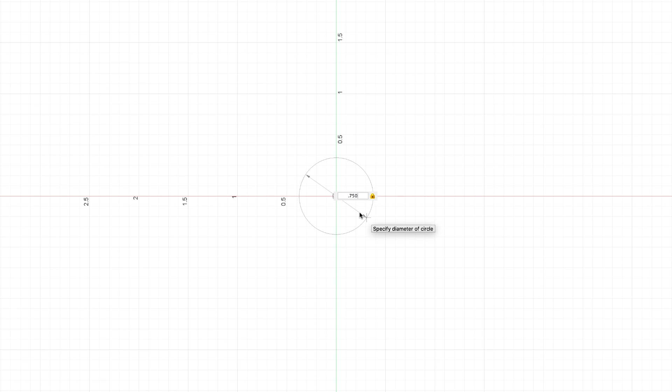And what I'm going to do is go ahead and drop down 3 more of those circles. So C for circle, I'm just going to put it right here. I'm going to click 0.750, enter. C for circle, 0.750. C for circle, 0.750 and enter.

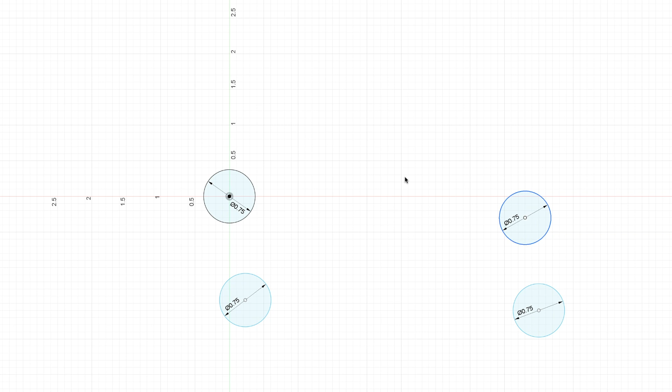Now I want these to kind of be in the shape of a rectangle. Some of these got to be in line with each other. So what I'll do is just come up to constraints, hit horizontal vertical. I'm going to hit that center point and this center point. I'm going to go to this one and to that one, this one to that one, and this one to that one. I'm going to press D for dimension.

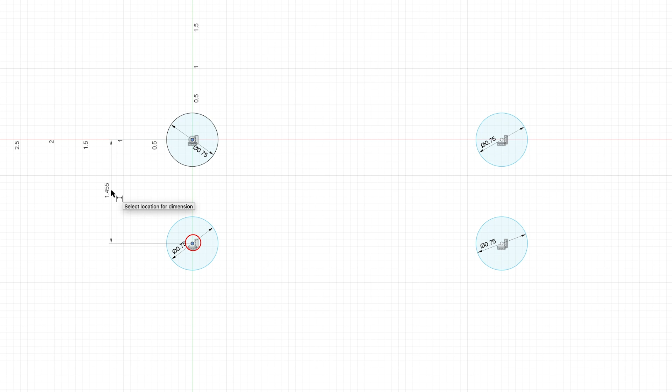I'm going to go from right here to right here. That is a dimension of 1.150. Enter. I'm going to go from here to here. That's a dimension of 5.25. Enter. Now I'm going to press C for circle.

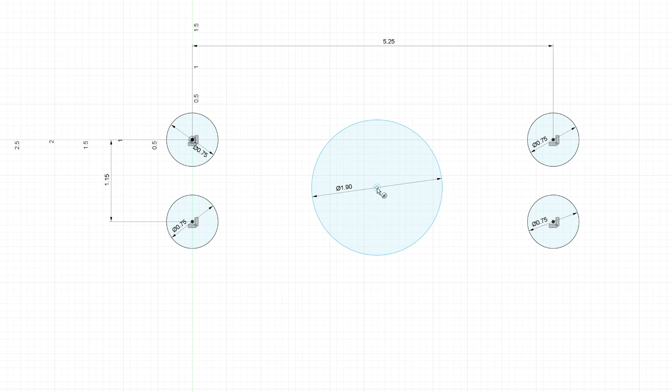I'm going to click right here and type in 1.9. Enter. C for circle. I'm going to let it snap right to the middle there. I'm going to click and drag it out. 1.05. Enter. C for circle again, snap right in the middle, type in 1 and enter.

I'm going to go ahead and select that 1-inch circle, make sure that it's highlighted, and then I'm going to press X. That turns it into this dotted line, and we won't have to bother with that when we go to extrude anything. Let's go ahead and add some dimensions to it.

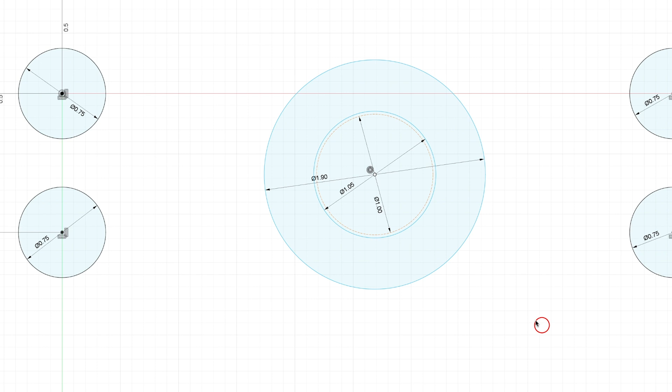So I'm going to press D for dimension. I'm going to go from here to that. The dimension is 2.625, enter. I'm going to go from there again to the same center point. I'm going to drag it over to that side and type in 0.575, enter. And now we got all that stuff where we want it.

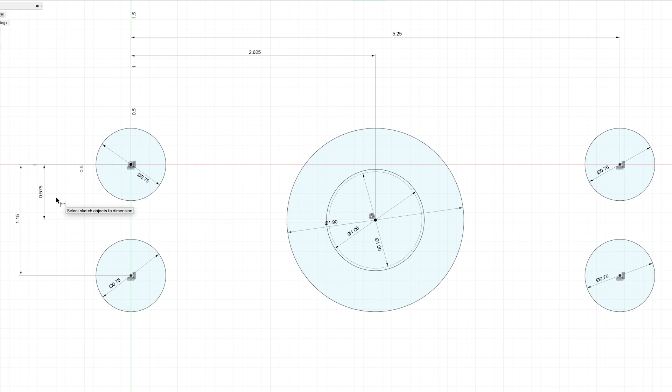So I'm going to go ahead and press escape to get out of the dimensions command, and I'm going to press L for line. With the left mouse button, I'm going to click on the edge of my circle, holding down the left mouse button. I'm going to drag that line out. And what I'm going to do is I'm just going to run it right into the side of the circle. I want to make sure I don't go below the center line of this circle, like down over here.

Again, I'm going to click, drag and hold. I'm going to kind of come over here and let go. Click and hold, drag it over, touch the side of the circle, let go. Again, like that.

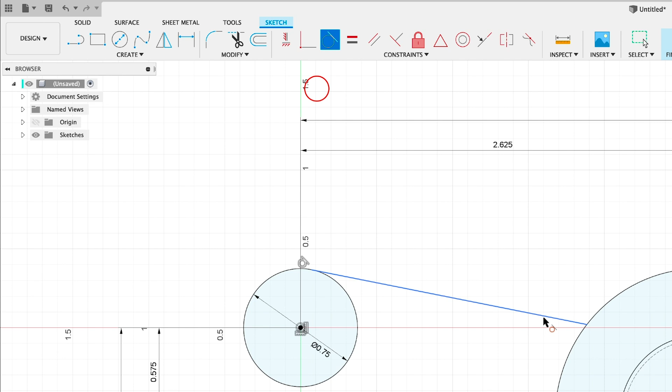Now we can come up to constraints, say tangent. I want this line tangent to that dotted line. This line to the dotted line. This one to there. This one to there.

Now I'm going to press escape and C for circle. Out here on the edge, I'm going to click and drag out. That is a 0.6, enter. C for circle, again over here off to the edge, 0.6, enter. I'm going to come up to constraints, say tangent, that to that one to that one, this one to that one, and that one to that one.

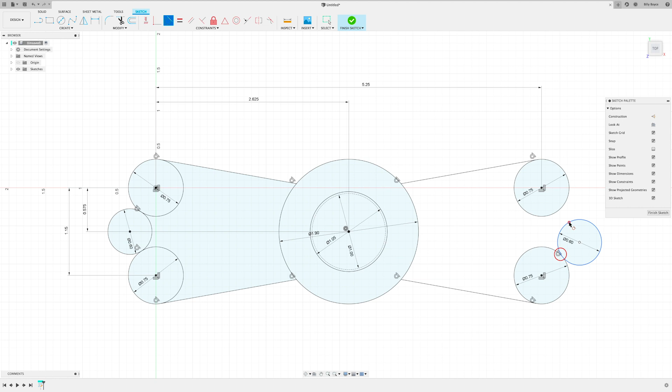Okay, now we can come up to modify, and we're going to break. I'm going to click this top, and you can see in between the 2 red X's is where it's breaking, and then there.

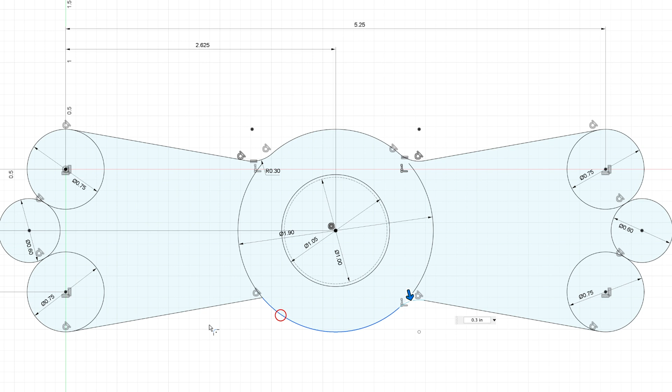Now we can come up to modify, fillet. I'm going to click here and there, then type in 0.3. I am not going to press enter yet. Now I'll make that selection, and this one and that one, this one and that one. Now I can go ahead and press enter.

I can right click, say press pull. I'm going to choose that and these circles, and type in minus 0.75, and enter. Okay, so that finishes off sheet 1 of 3.

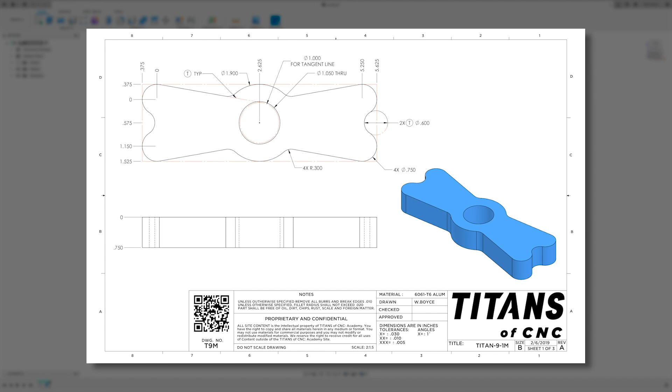Now we can go ahead and move on to sheet 2 of 3. We're going to add those counter bores first. So what I want to do is come over to the sketch and hit this little arrow, that'll drop that down, and then I'm going to click that crossed out eye. That'll turn the sketch on so we can see it, and we're going to use these points from the circles we already drew.

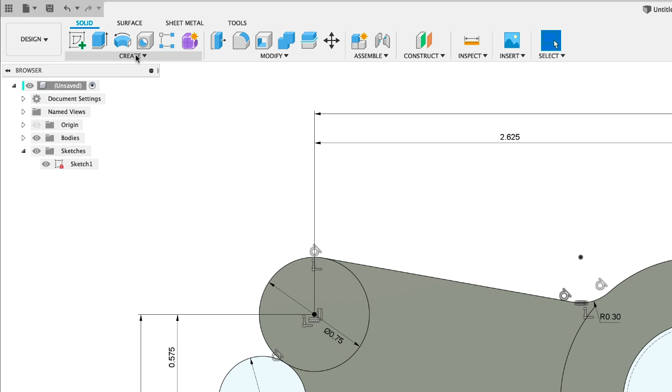So we're going to go create, hole. We're just going to select those 4 points. We're going to make sure we're set to distance, we're going to do the counter bore, and a through hole with a drill tip point.

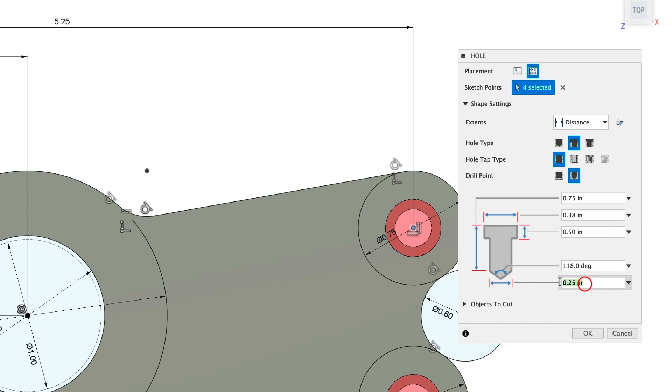The total depth of the drill hole is going to be 0.75. The diameter of the counter bore is going to be 0.38, and the depth of that counter bore is going to be 0.5. 118 is fine for the drill tip, and the diameter of the through hole is going to be 0.25. We can go ahead and say OK.

Then we can come back over here and click that eyeball and turn those sketches off so it'll look like that again. Okay, that looks good. So let's go ahead and prep this to do the next cut.

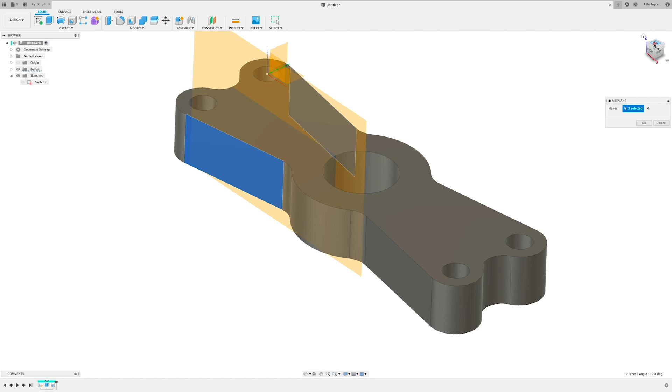We're going to come up here to construct, and say mid-plane. I'm going to choose that angle there and that one there, and it'll slap us down a plane right in the middle of our part, which is kind of handy. I'm going to go ahead and say OK.

Now I'm going to come up to construct again, come on down here to point at center of circle. I'm going to select that and select that edge, and that'll give us a point right there. I'm going to say OK.

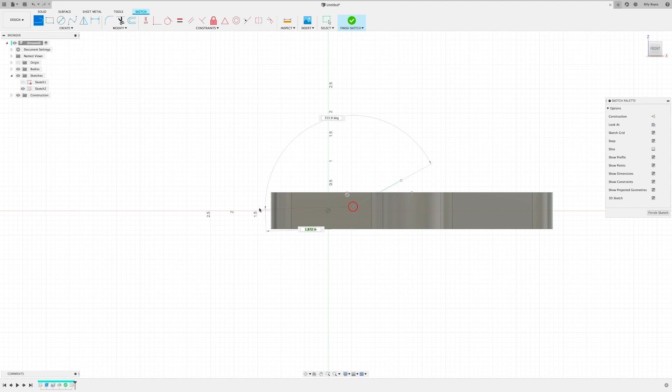I'm going to come over to create, sketch. I'm going to choose that new plane, and then press L for line, or you can come up to create line. I'm going to snap right here and just do this little shape, have it look something like this. I'm going to press escape.

Then I'm going to come up to constraints, say horizontal vertical. I'm going to select this one right here. I want to ensure that this one is also horizontal, so I'm going to go ahead and click it. I got a little warning letting me know, yeah, it already was, so we're good. I'm going to press escape.

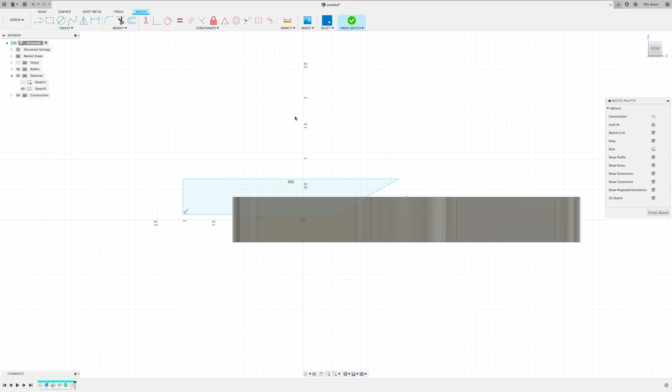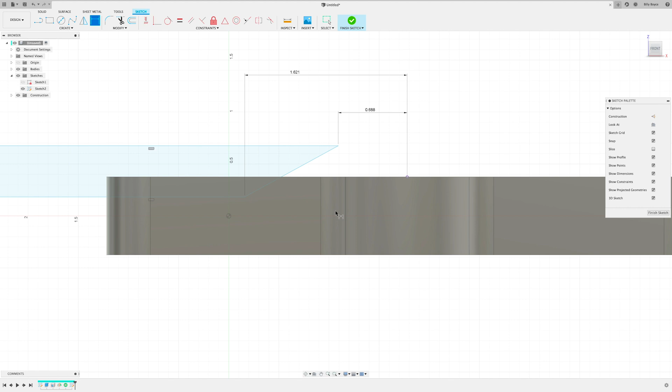I'm going to press D for dimension. I'm going to go from that endpoint to this point. That is a dimension of 0.688, and enter. I'm going to go from that point again to this one. That is a dimension of 1.621, and enter. Then we're going to do a dimension from here to that bottom line. That's going to be 0.250, enter.

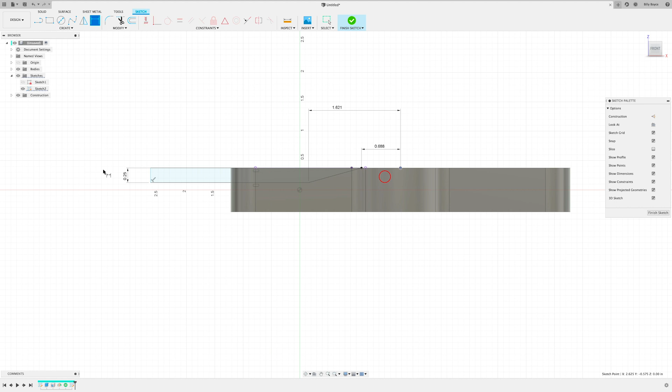We can go ahead and come up to constraints, coincident. I'm going to go ahead and say this point to this edge, looks good. I'm going to press escape, D for dimension. We're going to go from this center point to this edge. We'll just say 4 inches and enter.

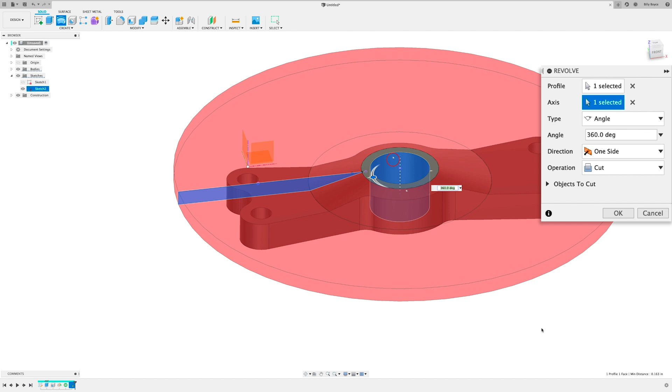Then we can come up here to solid, create, revolve. It automatically selects the sketch that we had open. It's already ready to select the axis, so I'm just going to click the side wall of that through hole, and we should get something that looks like that. I'm going to go ahead and say OK.

Now I'm going to come up to modify and fillet. We'll go ahead and add these fillets right here. Select both of those, and then you can type in 0.5 and enter. We can see we have a 25 thou chamfer around this outside edge.

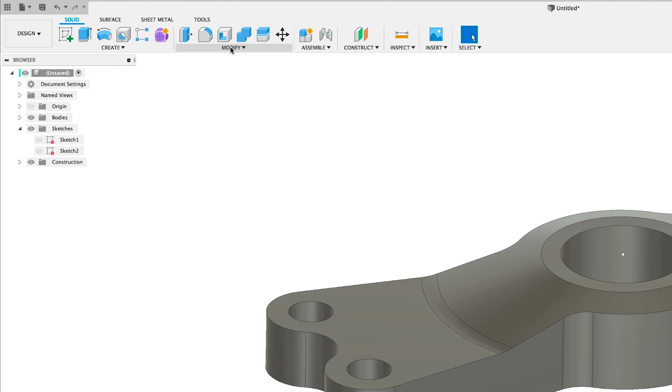So we can come up to modify, chamfer, select that edge and type in 0.025. Go ahead and hit enter. And that finishes off sheet 2 of 3.

Now we can go ahead and move on to 3 of 3. First thing I'll do is come up to create sketch. I'm going to choose that top surface. I'm going to press C for circle. I'm going to let it snap right to the middle.

And I'm going to drag that out, type in 1.25 and enter. I'm going to go ahead and right click, press pull, and I'm just going to select that entire circle.

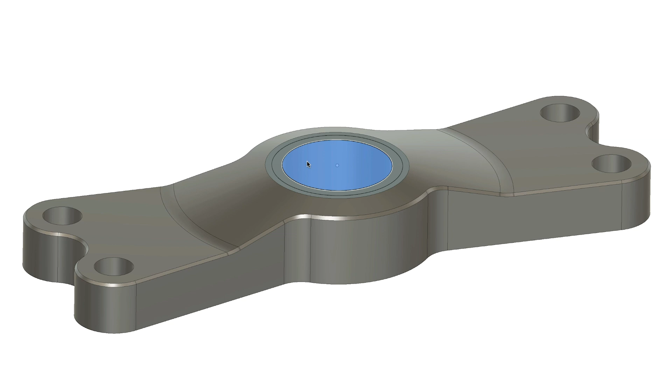And then I'm going to say minus 0.5. Enter, and there we go.

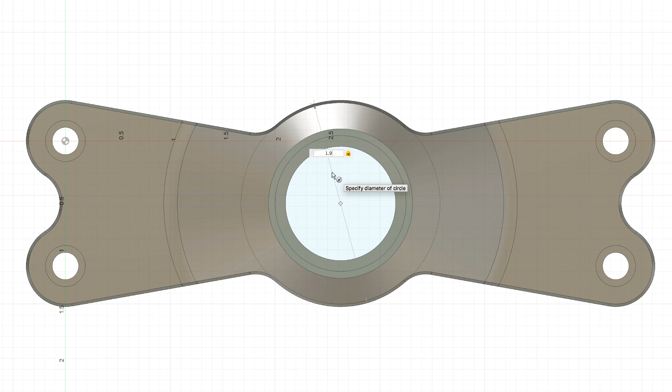We're going to go ahead and create another sketch on that top surface again. I'm going to press C for circle, snap right in the middle, and type in 1.9. Enter. C for circle, 0.750, enter. I'll do three more of those. C for circle, 0.750, enter. C for circle, 0.750. C for circle, 0.750, enter. Now we're going to use constraints to get those centered up on those counter bores.

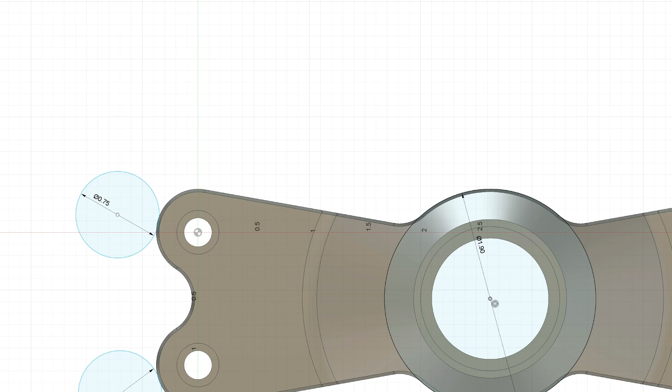So we'll go constraints, concentric. Say that to that through hole, this to the through hole, this to that, this to that.

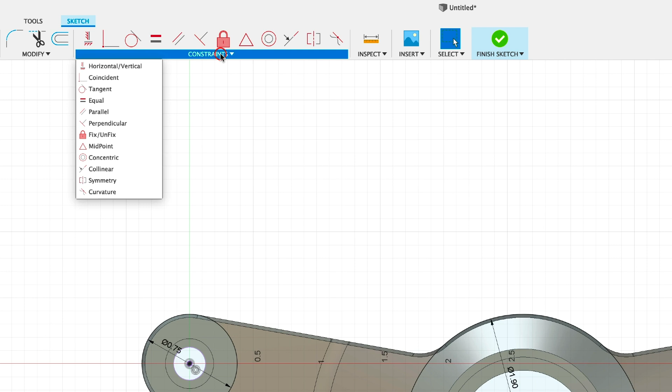I'm going to type in C for circle and do them on the inside here. I'll click, drag, type in 0.651, enter. C for circle, 0.651, enter. Again, I'm going to come up to constraints and say tangent: that to this one, to that one, this one to that one, this one to that one.

Now I'm going to press escape, go to create line, and put a line right here like that. Press escape, L for line, drop another one over here, escape, L for line, escape, L for line. And there we go.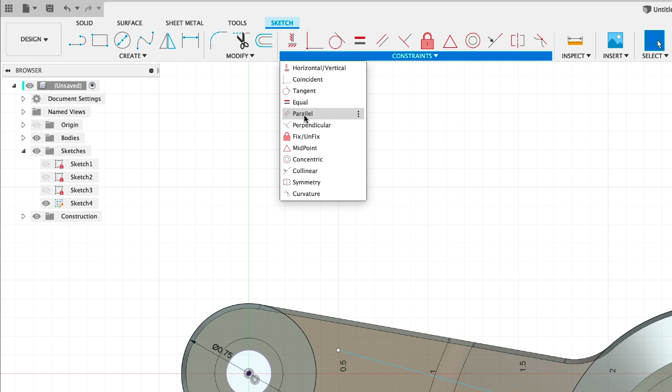I'm going to come up to constraints and say parallel. I want that one to be parallel with this edge, this one with that one, this one with that one, this one with that one.

I'm going to press D for dimension and go from the edge to the line. I have a distance of 0.15, enter.

Again, I'm going to go over here and add the dimension. When it's highlighted, I'll just copy this dimension by clicking it and hitting enter. Now if I change this one, it'll change them all. I'm going to do that with all three of them.

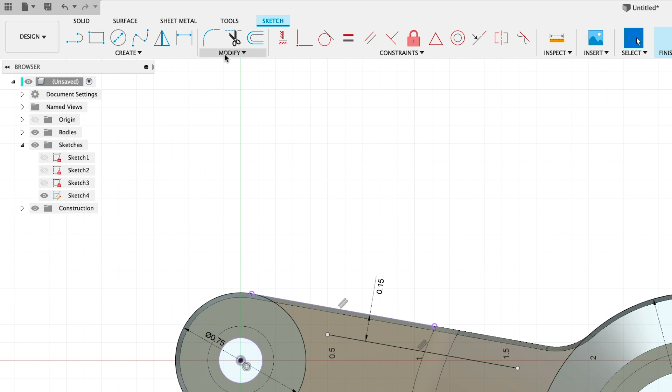Okay, I'm going to press escape to get out of that command. I'm going to come up to modify and extend, and make sure those run into the circles there.

Now we'll go up to modify, break. We're going to break this circle here and here. We'll go ahead and break that and that, this and that.

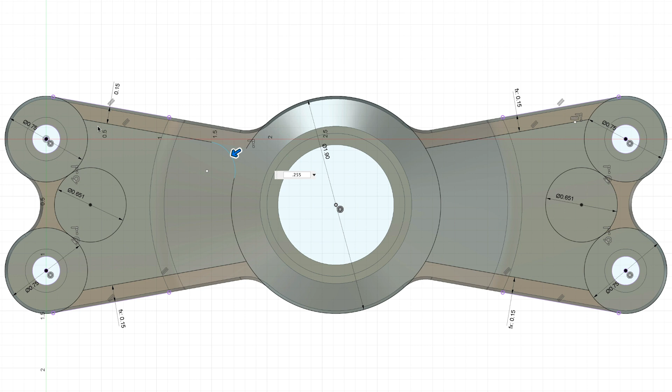Now we can come up to modify, fillet. Go ahead and select here and there. I'm going to put a dimension of 0.255, and I'm not going to press enter yet. I'll go ahead and select this one and that one, this one and that one, this one and that one, this one and that one, this one and that one, this one and that one. Then I'll press enter.

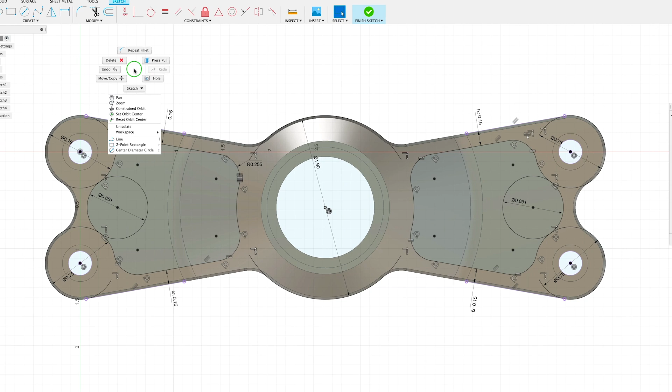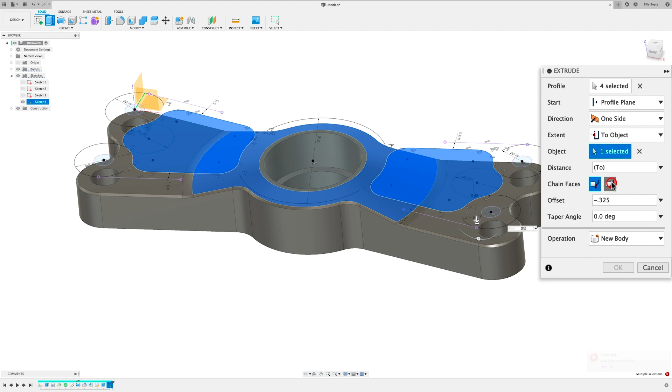Then I'm going to right click and press pull. We'll go ahead and choose all of that. We'll go to extent over here and say to object. We need to select this surface here. In the offset, we're going to type in minus 0.325 and then hit this guy right here. What that'll do is cut that pocket, and the pocket will be parallel with the surface. We can go ahead and say OK.

Now all we have to do is add a couple fillets and some edge breaks. Let's go ahead and go up to modify, fillet. I'm going to select that bottom and that edge there. That is a dimension of 0.25, enter.

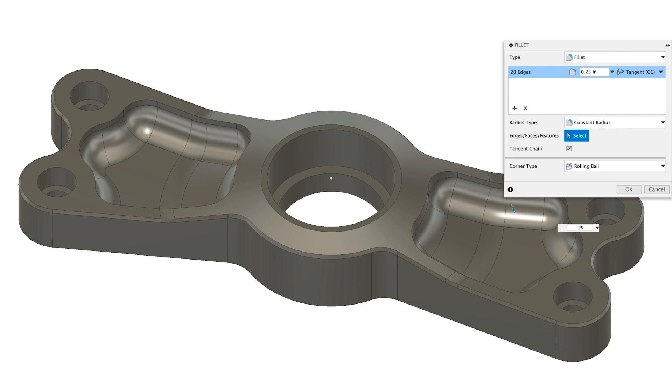We're going to come back up to modify, chamfer. Let's get these two pockets. That's a 0.025, enter. We can right click and repeat chamfer.

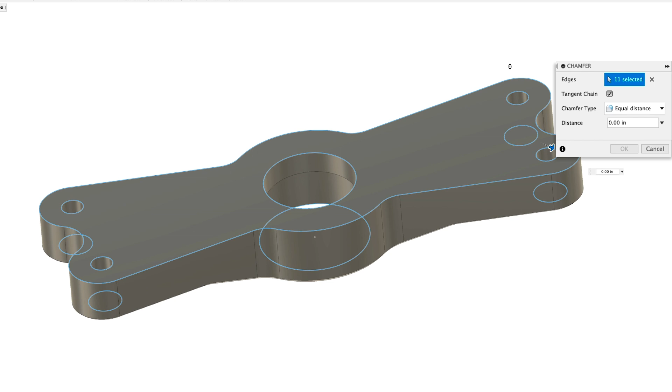And then I'm going to go ahead and just pick these sharp 90s on the tops and the bottom, around the edge, contour the part, that guy there, this one, and that one. I'm going to type in 0.01 and enter. And there you go. That is the Titan 9M.